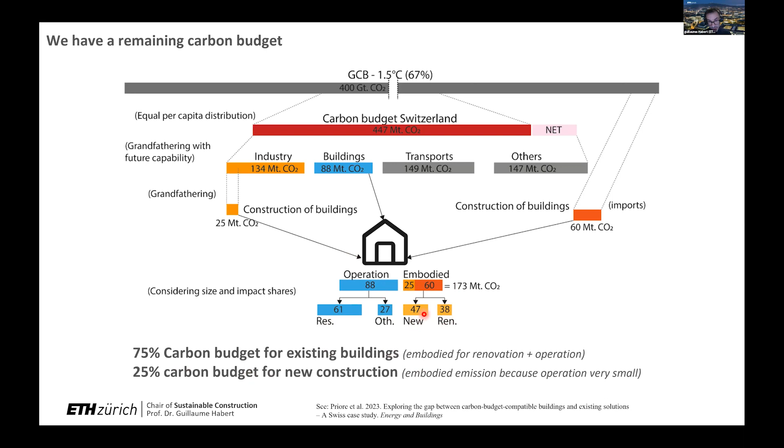New building, renovating building, and heating the residential building and the others. So to make it simple, you have 75% of the carbon budget for existing buildings, if you take all this plus the renovation. And then we have 25% of the carbon budget that can be used for new construction. With this, we need to adapt the existing building stock - all the buildings that we have built in Switzerland - and we need to build a few extra buildings, and then that's it.

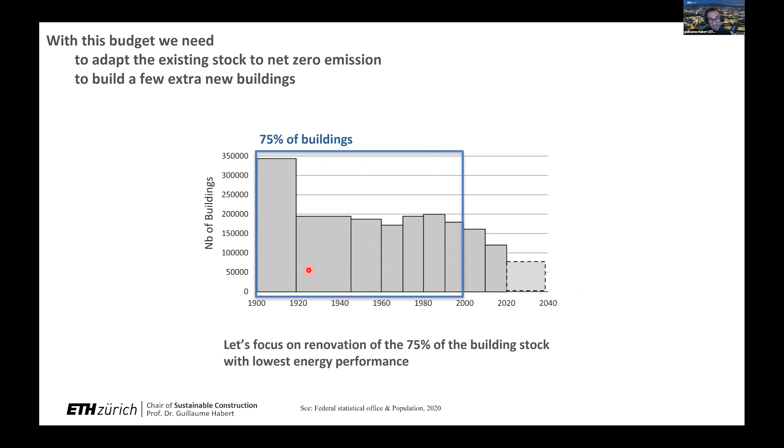So in my talk now, I will focus more on this renovation of the 75% of existing buildings, the ones that are not energy efficient, built before 2000. And what do we do with them? We need to renovate them to reduce their energy consumption. And the question we have is, what is the best renovation scenario?

Thinking 'best' - how do you define best? What is best for the economy? What is best for the environment? What is best for the users inside the building, or for the owners of the building? What is best if I think of one building, or what is best if I think of the full building stock? And of course, depending on how you consider the situation, you have maybe a bit different answers.

And of course, yes, and then we see - I would say at least the environment is probably the non-negotiable target. And then if it's good for the users, it's probably more of a social justice question. If it's good for the owner, it's more of an economic strategy question.

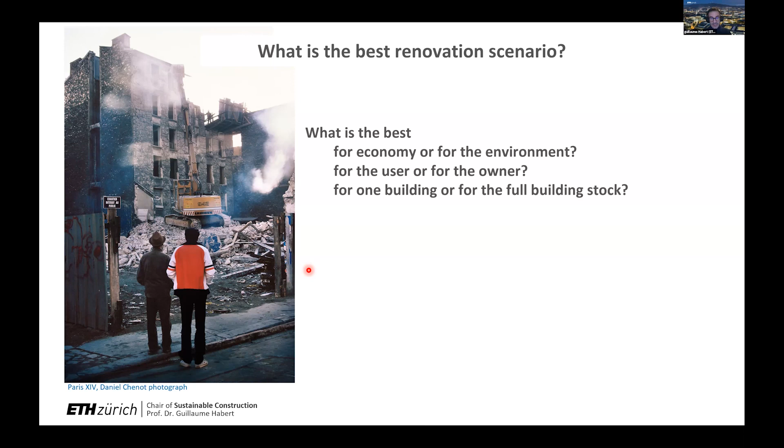Let's discuss. So you have different possibilities to renovate. One, you could say I demolish and rebuild everything. Or you could say I renovate - and if I renovate, do I renovate the envelope? Do I renovate the heating systems? And if I look at the heating system, do I keep the same one, or do I change it? And if I change it, do I change for wood, for heat pump, for district heating, etc.?

And do I scale these solutions? That's - and I will try to make this interactive. I will try, I'm not sure it will work. Let's see.

That's again Yasmin Priore - another work that she did, looking at a parametric model. So you would say, okay, in 2050, if we renovate, what's the consumption of operations - kilogram CO2 per square meter per year - your energy consumption emissions during operation for the new building, for the renovated building, and then how much energy emissions you spend to renovate your building, to build your new building, and how many buildings you renovate per year, 1%. All this is a kind of business-as-usual logic.

And if we link this in Switzerland, we arrive at 500 megatons CO2, which is way above our 2-degree target - 2 degrees would be 400. And then there's the Swiss target and the 1.5 degree target. So what do we do? My first question - and that's where I try to have some interaction. I'm not sure... maybe I'm doing this a bit too much.

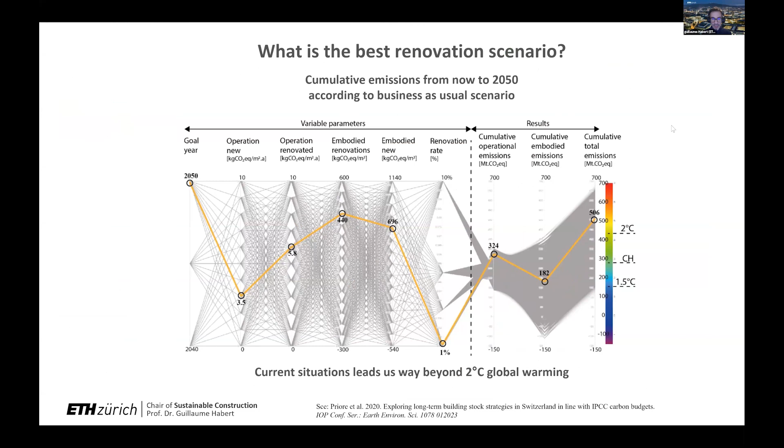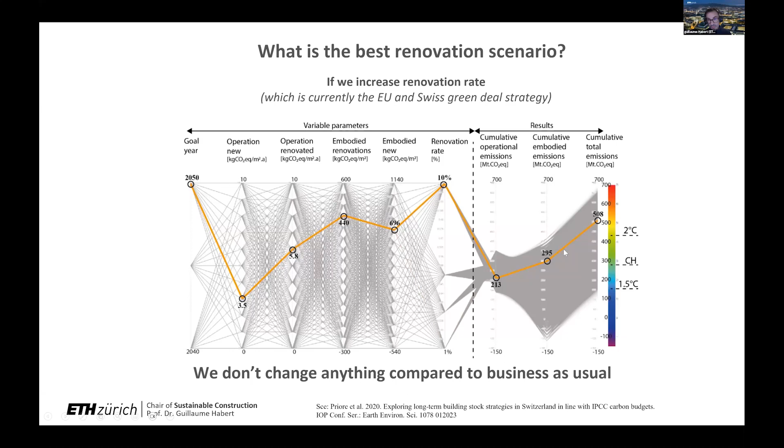Let's do it like this. If I renovate more, that's what will happen. If I move to 10% renovation, you see it was 506 before renovation, and then it's 508 after 10% renovation. Why? Because before you had all the emissions linked to the operation and not in the embodied emission, and now everything is in the embodied and nothing in the operation emission. Basically you've changed nothing, you've just changed who's emitting the building.

So going the other way around, thinking what are the solutions that allow us to stay below 1.5 degrees. We look at this nice diagram, like a web of all the possible solutions. Suddenly you see that the rate of renovation isn't so critical, you can still work with 3% renovation, same for the rate of operation.

The thing that is absolutely not possible is to have embodied emissions, CO2 emitted for renovation, that is too high. Same for new construction, we absolutely need to be negative in our solutions. Minus 120 kilograms CO2 per square meter would be the type of renovation that is the only one that will allow us to stay below 1.5.

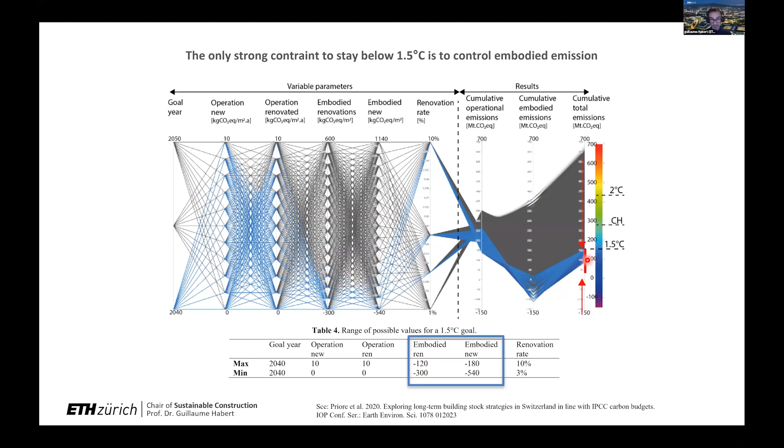If we go towards the Swiss solution, not the 1.5 target but something in between the two, it's a bit less radical. You see that kind of all the possibilities will still allow us to reach this, except if we are too intense in the embodied emissions for renovation and for new construction.

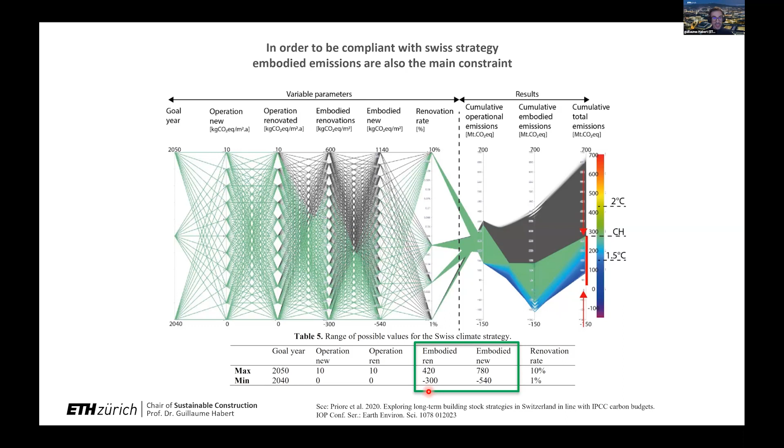We need to be careful about this renovation. That was my point about renovating: we need to take care about the materials we're using for renovation, and to be kind of radical in the sense of how do you renovate with a minus. How do I get minus CO2 in my renovation? Well, I need to store carbon in my renovation.

I have three examples here. Really nice examples of renovation that store carbon in the built environment, storing carbon in renovation. This is a nice example.

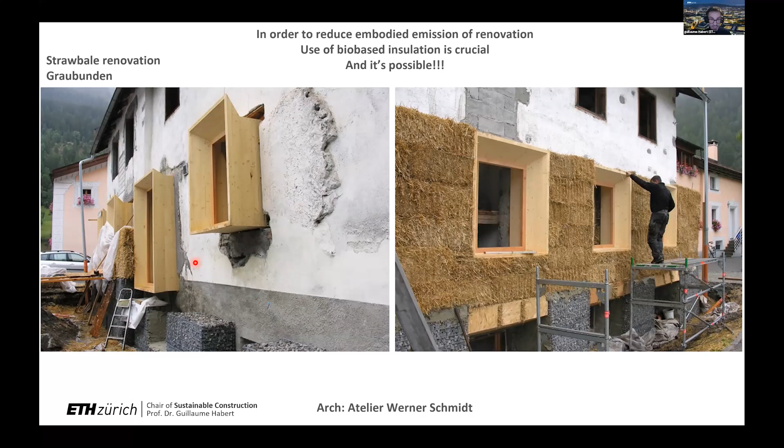I don't know if you know it, from Graubünden, from Atelier Werner Schmidt. It's a renovation of a straw bale house, an old house where he put something like 60 centimeters of new straw bale on the old facade. You have a wonderful building completely integrated into the architectural aesthetic of the place, but it's in straw bale, so it means it has stored carbon when you renovate it.

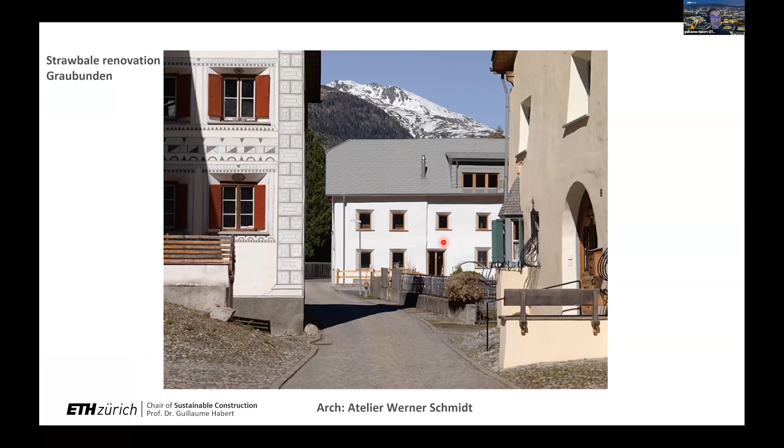Here's another example, in Paris. I'm from Paris, so maybe I'm a bit biased, but this is a nice example of a hempcrete renovation on the facade. Again you don't see it, it's completely well integrated, it doesn't look like a hemp facade. It's historic buildings in Paris.

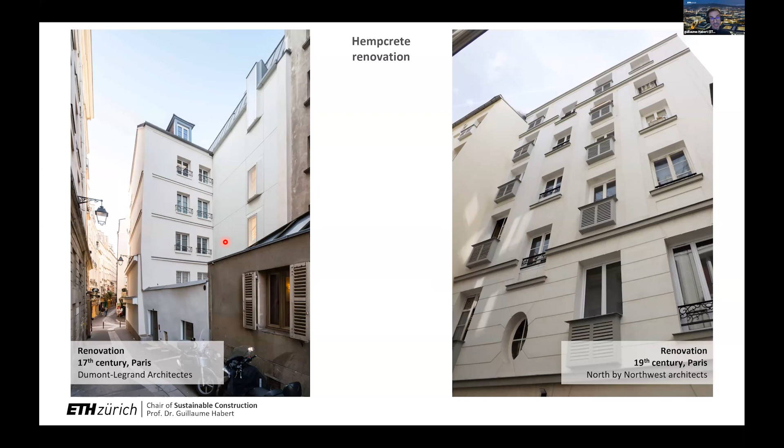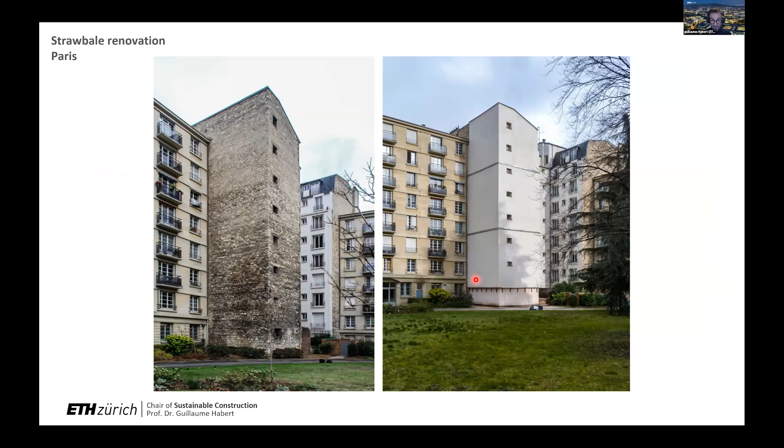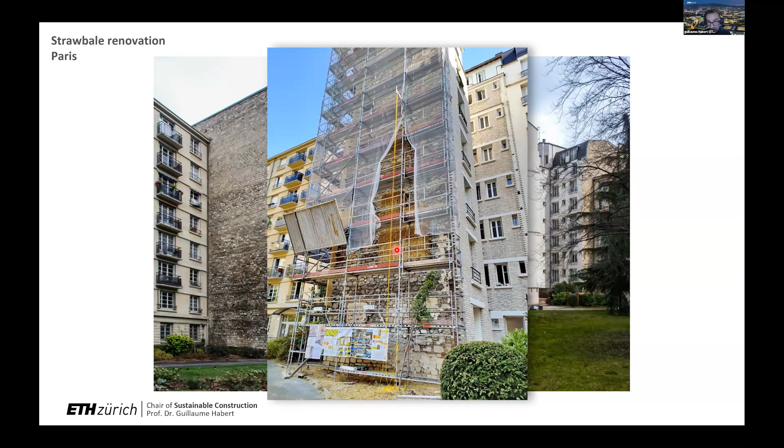Here's a straw bale renovation done recently in Paris, with 50 centimeter straw bale on these walls. They put straw bales on the facade. The really cool, funny thing is that it's overhung, suspended straw bale. You have the feeling of ropes suspending the straw on the walls at the bottom, and at the top it's a classic wooden frame with straw bale stuck in between.

So you have solutions to actually put massively straw bale, or at least bio-based materials, that allow you to store carbon in your renovation. With that, you can probably reach something like minus 100 kilograms CO2 per square meter per year.

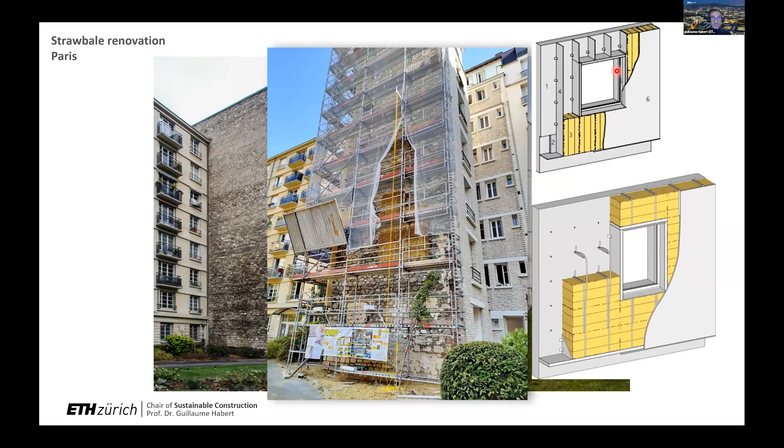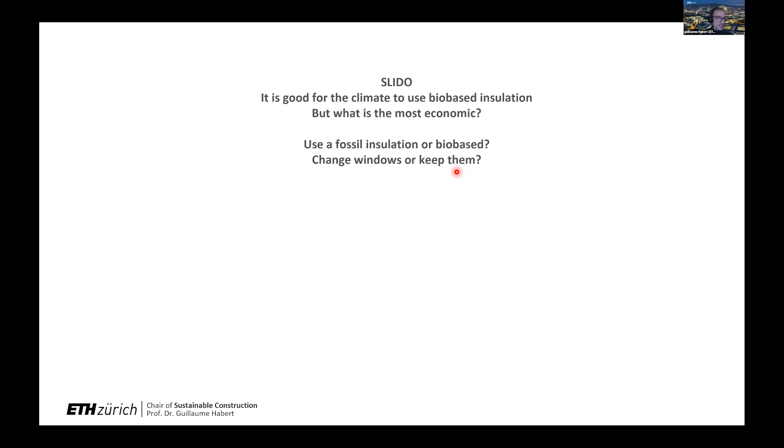The other thing, which I'll keep for the discussion afterwards - I put my straw bale. Is it cool? But is it the most economic way of doing it, to put straw bale in the facade? Should we not think about windows before, or heating systems? I like straw bale, but is that all we should do to save the climate? That's another work that Alina Galimshina, a PhD now postdoc at ETH, did.

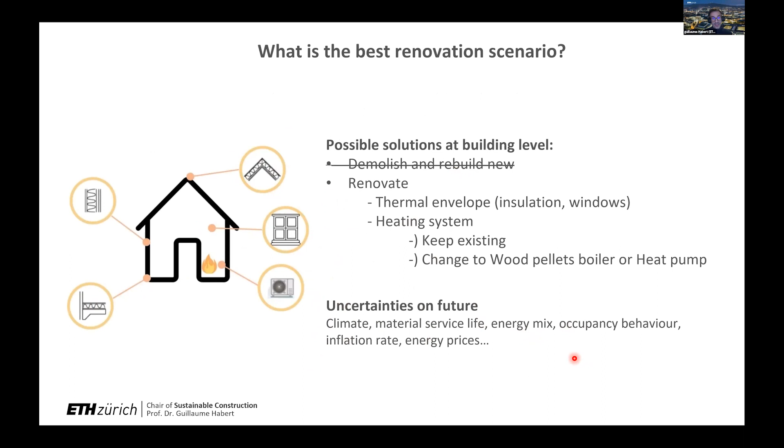She worked on this renovation solution, which I will now show you. She looked at all the possibilities of renovation, including uncertainty - thinking about the future, maybe the climate is not the same, maybe the energy mix or costs are not the same. What are the best solutions? She reached several conclusions, and I'll show you briefly 3 results that she found.

One is: if I use just conventional material on a very conventional building in Switzerland, what do I do? She looked from the CO2 perspective and from the cost perspective. What is best if you use a heat pump, a wood boiler, or if you keep the existing building technical systems?

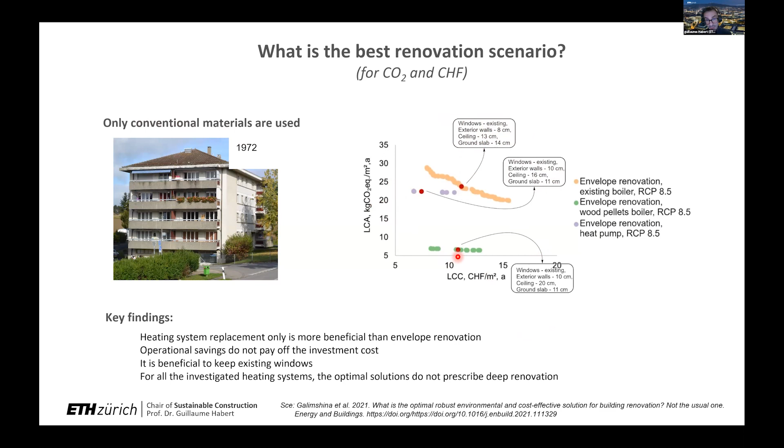She arrived at solutions which I think are interesting, in the sense that you're always keeping the windows, and the amount of insulation you use is actually very small - 10 centimeters compared to Switzerland, where classic renovation would be like 25 centimeters. So from a cost and CO2 perspective, the best renovation, whether bio-based or conventional material, is something where you don't renovate too much. Basically, you keep the windows, you don't insulate too much, but you change the heating systems - you go for wood pellet or heat pump.

And of course this has a problem, because if you don't insulate too much, then someone needs to pay the energy bill. So compared to what is best from a cost perspective, it means the user is paying the energy and the owner doesn't invest too much. From a social justice perspective, we could ask: is it really the optimal way of doing it?

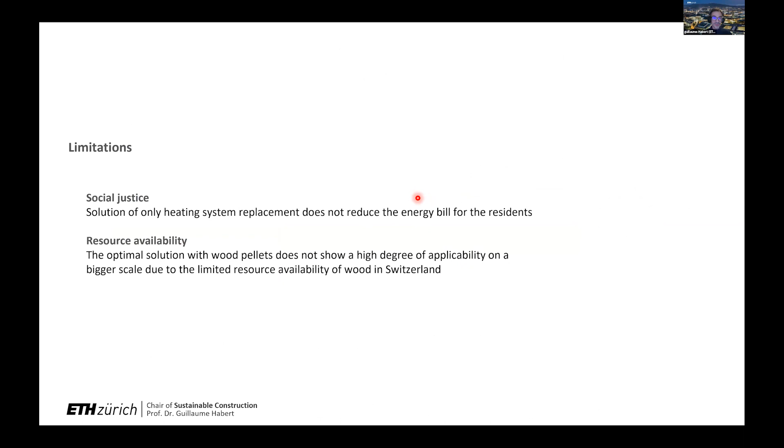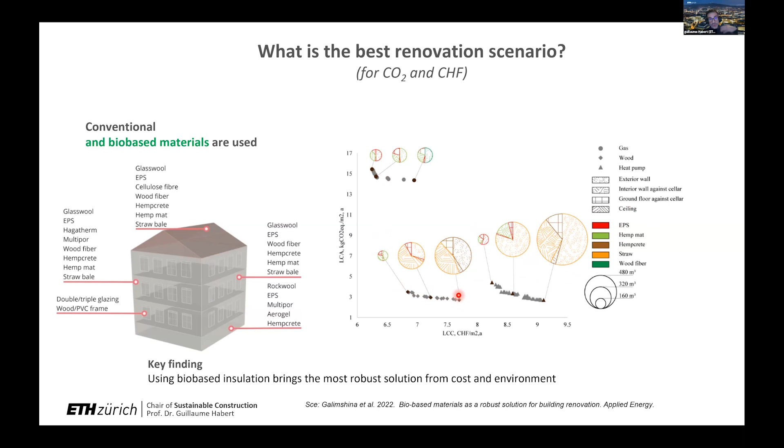So we asked: what happens if I use bio-based material instead? It's completely different - suddenly this is the amount of insulation we can use. Red is fossil and yellow is straw; the solutions that appear use as much bio-based material as possible, by volume, because the more you use, the better for the environment. You increase the cost a little, but it's still better than all other solutions. So the best solution is using a lot of bio-based materials, which then reduces both the energy and the cost.

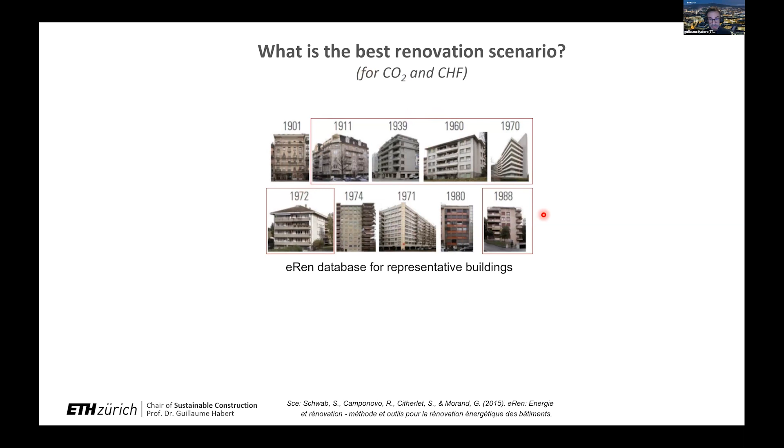We did that for many different buildings in Switzerland to look at the results. From the environmental perspective, if I use conventional material, the best I can achieve is about 6 kilograms CO2 per square meter per year. With bio-based, it's always better - whatever the initial energy consumption of the building before renovation. We covered all types of buildings in Switzerland from 1910 to 1988, and whatever the initial energy, it's still much better to use bio-based materials.

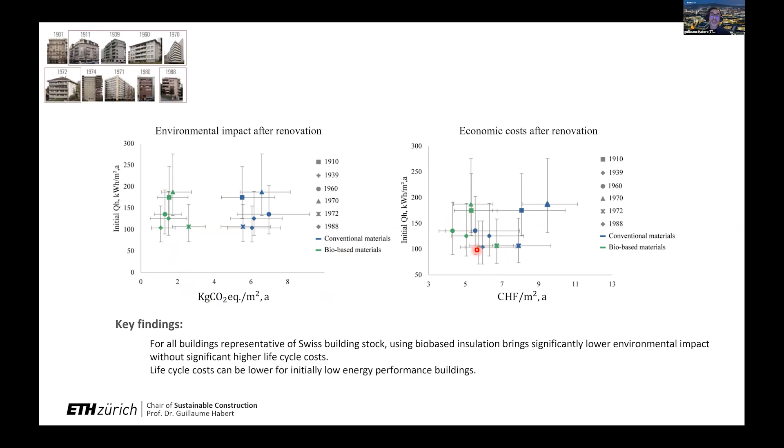What's interesting is the cost is also the same story. Whatever I do with conventional material, if you look at the uncertainty, bio-based is more or less always cheaper over the overall life cycle cost. It's always better - it's the cheapest option and the most environmentally friendly option if I use a massive amount of bio-based material, and of course change the heating systems.

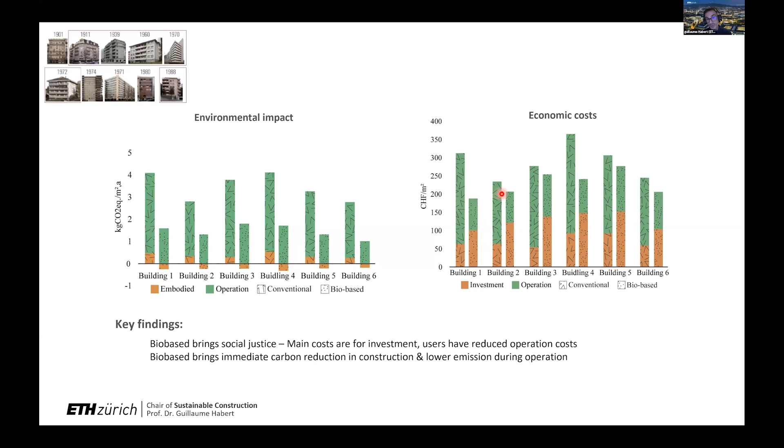From a cost perspective, the overall cost is smaller than conventional, but the investment is different - you need to invest more upfront because you use more bio-based material, but you save on operation, and overall you always save. With that, maybe I'll open the question. My summary is: yes, you should renovate, of course, but how?

First, you need to change the heating systems. There's no way you can save with your oil boiler or your natural gas boiler. It's like we need to change the heating systems. That's the first thing we do.

Then we need to renovate. If we renovate the envelope with conventional material, we have to be extremely careful not to change the window and to use a very small amount of insulation material. Otherwise, the embodied emission of this conventional material like polystyrene and things will increase even more the CO2 emissions. So it's kind of not a great option because we can't put too much insulation.

On the contrary, if I put bio-based, then I can put as much insulation as I want because I will store carbon. I still don't necessarily change the window because the embodied emission of the window is too high and doesn't pay back. And I change the heating systems, of course, for all.

And with that, I have a solution where I have reduced the energy demand because I have put a lot of insulation. I have reduced the embodied emission because I have stored a lot of carbon in my bio-based insulation. And then I have a perfect renovation.

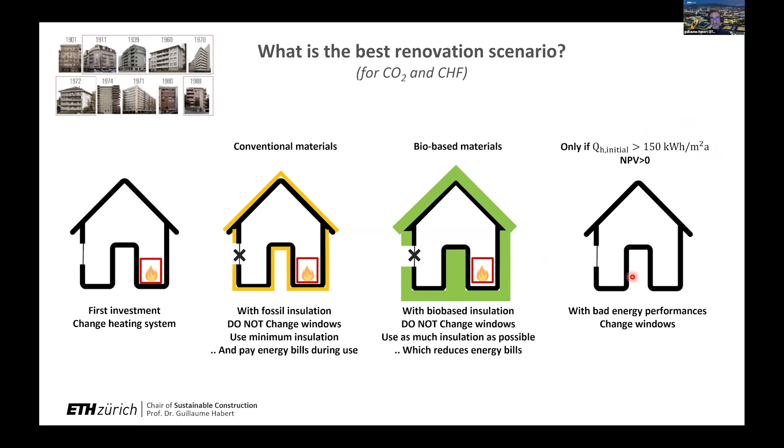And with that, I'm looking forward for the questions.

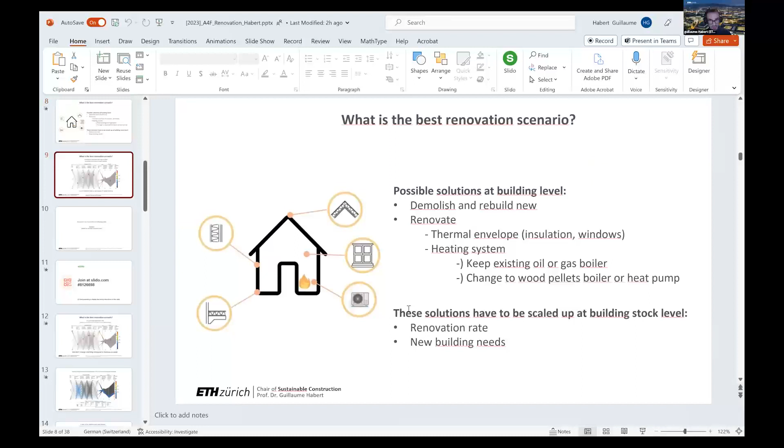This is this type of question that... Yeah, well, they were like, what is the best standard that we should go for in renovation? And it was a very high standard with thick insulation. And you were saying that you were talking about 10 centimeters now, which I found very surprising.

If you see my screen. So what I mean here, what I see is that...

Of course the quality of your renovation counts. If you're completely energy inefficient, it will not work. But what counts most is the carbon emissions that you put for achieving this energy performance.

So for me that seems quite high. I've seen lower shares in other studies. Maybe it's because I didn't look into the details, or maybe because this is applied differently. Of course the embodied share is something we need to take into account, and it's very important—we need to think about the material. But for me it just seemed a bit strange as a result.

So yeah, it's not a question, it's more a comment. I don't know—yeah, I mean clearly, let's say, what I can say is that the calculation we did, we are confident in the result.

Then of course it depends on the hypothesis you make and the current situation. It is a very Swiss case where the operation emission—that's my point—the energy consumption of the building is already relatively small, we have good building stock. So if you compare to Germany or France, we don't have completely uninsulated buildings. We already have good buildings.

Then the second point is it's not a question of energy, it's a question of carbon. When we operate the building, if you use electricity like a heat pump, then the energy is really decarbonized. So even though you consume energy during operation and your operation energy is not null, your carbon intensity of energy is actually low, so you don't emit a lot during operation.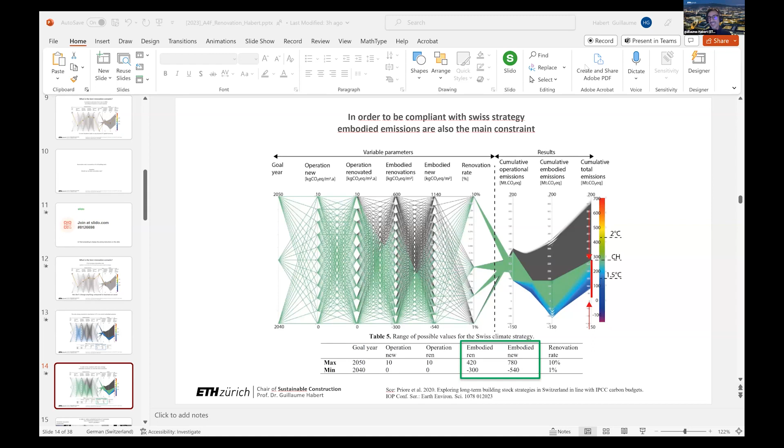That's where we have, like, this value that we found. So 420, the maximum that we took—this is where we say, okay, to reach this Swiss strategy, it's 400 CO2 per square meter that you need to divide in Switzerland by 60 years. I'm bad at calculation, but it's less than 10. 420 divided by 60 is 7. So you have 7 kilograms CO2.

What is the sustainable strategy for the 2000 watt society? That's where I think we are at 5. So the recommendation would be 5 kilograms CO2.

So maybe, to be in accordance with your study, the embodied emission that we show is still a scenario where you're on the sustainable path of the Swiss renovation strategy—around 5 kilograms CO2 per square meter per year, which is the 2000 watt society label. So this scenario is still possible, it's just that if you do that, you have fewer options because you're already on the high range of the possibilities.

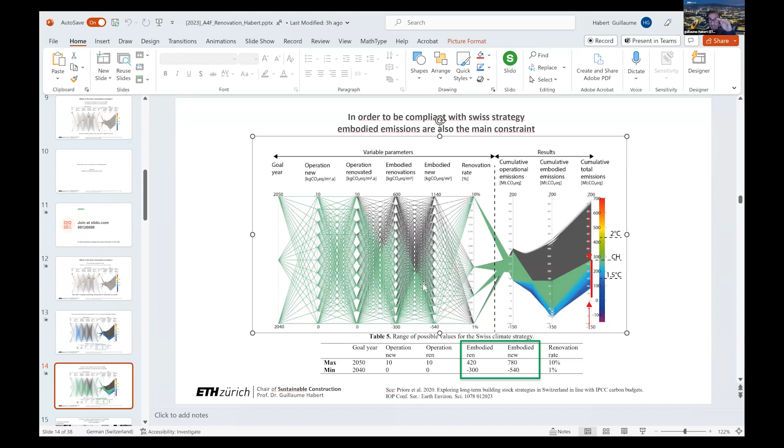I don't— yes. No, thank you, it's much clearer actually. Now I understand also that the starting point is very important to make sense.

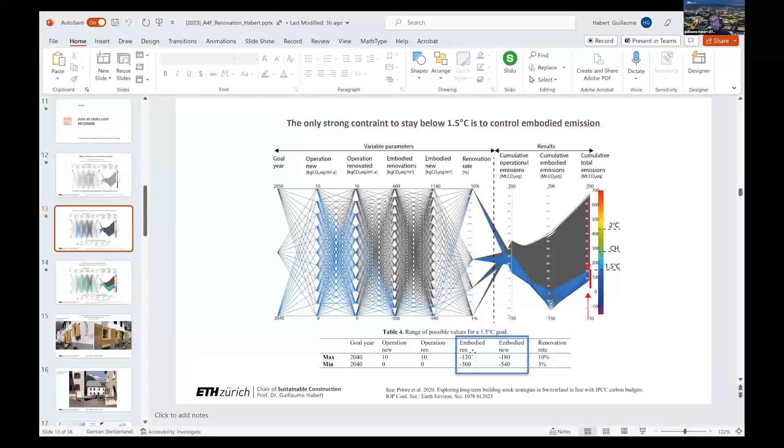Yeah, but it's not—I think, or at least, because here the hypothesis we take as business as usual may be relatively high. The other way of looking at it is what are the ways to achieve 1.5 degrees, and you say the way to achieve 1.5 is this: you need to renovate quite a lot, between 3 and 10. So the old number doesn't work anymore.

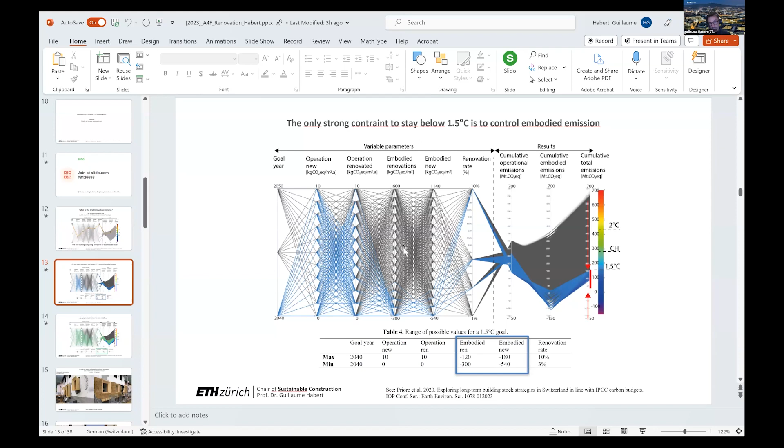And then for operation emission, you can still have solutions where you're not completely at zero. If you think again of the 2000 watt society, you have 2 kilograms maximum CO2 for new construction, 5 for renovation. And you could say, well, we could do more as long as we do something super negative here—which in the 2000 watt society would typically be 500 or 600 kilograms CO2. That's the point: we have solutions that work only if you allow slightly higher emissions.

Thank you so much. I don't think it's completely contradictory—I think it goes in the same line, basically.

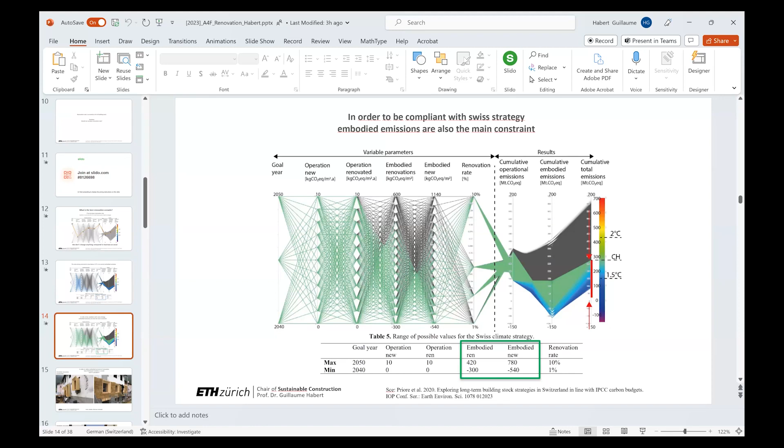And then the other thing is that we are looking from now to 2050. So the question is also, if you look at the study, if you think your building will last until 2060—60 years—and you look at the overall life cycle, yes, operation counts more and more. But if we think the emergency is right now, then the amount you emit in year 1 is what controls all your emissions, not so much the operation afterwards.

Yes, so of course the longer the building lasts, the less important the embodied emissions are. But the later it is—if we think 2100—yeah, who cares? Yes, so I completely understood.